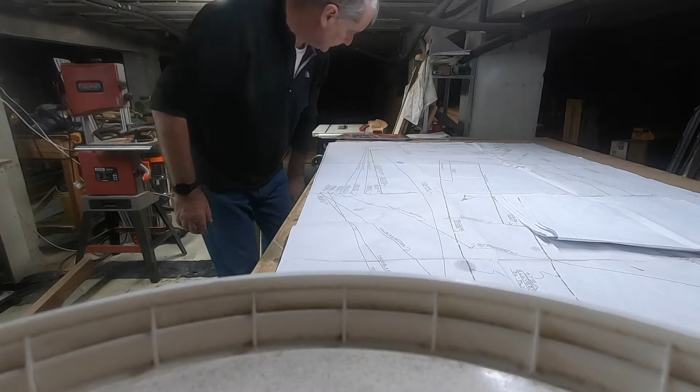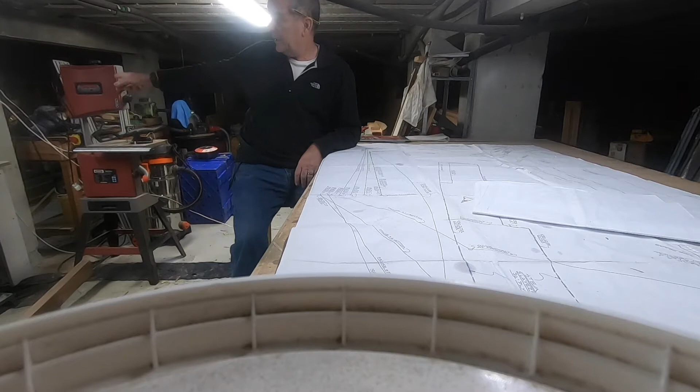I'm going to build it down here initially in my basement, because that's all I've got at the moment. This is underneath the house - I've turned the old kitchen into my workshop, and we've got the pool kit and stuff over here, plus loads of storage we didn't even know we had when we started rebuilding this house. The builder poked his head under a hole at the front where some sand had fallen in and said, 'we've got a basement down here.' So we dug a set of steps, and anyway, here we are.

The reason I can't put the boat together here is because all I've got is, I can show you, the door - and obviously the completed boat won't go out through it. So I have to put the frames together here to start off with, and I've got the plans for all of that.

There's all the plywood, many sheets. I've bought Sapele plywood, and then just got some normal, I think they call it Okoume or something, I don't know how to pronounce it. And then I've already started cutting out some 18mm marine ply - most of the wood is stacked up here, and I've labelled it all so I can see what's going to do for what.

Tools-wise, I've been accumulating. I've got my saw bench here, which is going to be very useful, I think. I've modified it slightly because I've put a floor switch in here so that you can press it on, but you have to press your foot to get the power.

If ever you get into trouble, you can just take your foot off the floor switch and it will cut it off. I never did quite understand why that wasn't done as a matter of safety, because the blade is turning towards you with this thing. If ever you get into a problem or it kicks, it's going to throw the lump of wood back at you, and both your hands are here trying to hold it, so you'd be fumbling down here for an off switch. Whereas with your left or right foot there, you turn it off straight away.

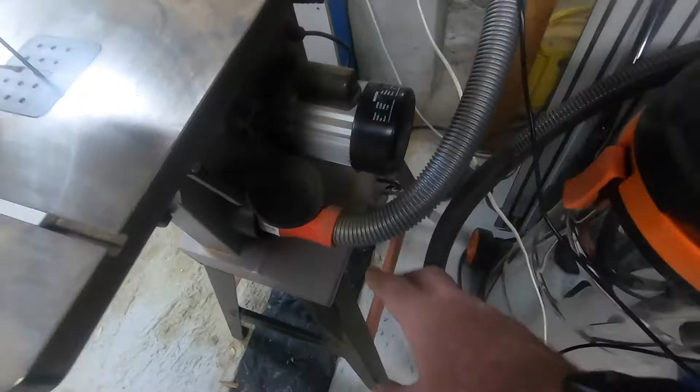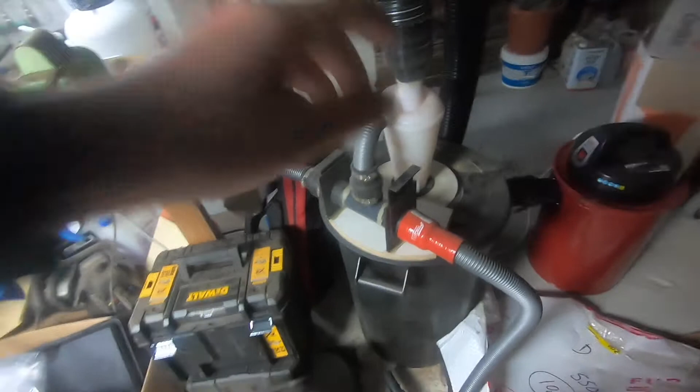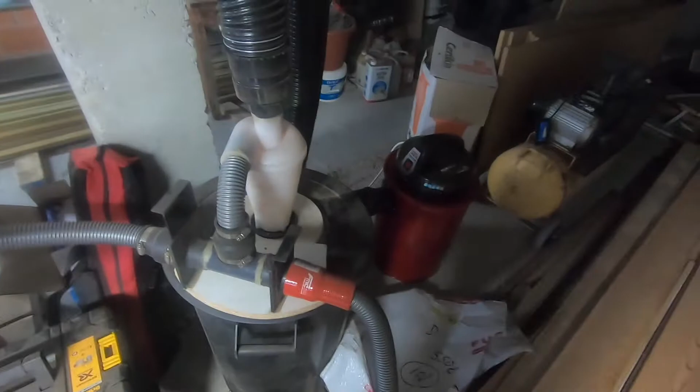With all these things, of course, they produce a lot of dust. So I've got a hoover for the floor, but I've connected it via this to this little thing - initially I bought that for the drum sander, which of course fills up in no time with dust. So I bought this dustbin, found it on eBay, care of, I guess, Mr. Dyson, the Hoover man. It just sucks down this pipe, up that pipe rather, and the pipe connects into, say, my saw bench there, and then you've got these blast gates. You open the blast gate for each side or both sides, and it sucks in, goes round the vortex - the sawdust drops out into the bottom, the air goes up into the top, and the dust fits in there. Since I've done that, it's been brilliant - I haven't changed any of the dust bags in the Hoover at all. So that seems to work quite well.

So, well, what am I doing? Why am I doing this? Good question. I'll think about that one. Why am I doing this?

I've always wanted to. I've seen these wooden mahogany boats, with the beautiful foredecks with white birch strips or filling on the decks, really high gloss varnish. They look beautiful - gentleman speedboats, and this is a gentleman speedboat, but it's got the barrelback, which is here on the plans. I'll show you a bit later because I've already started making it.

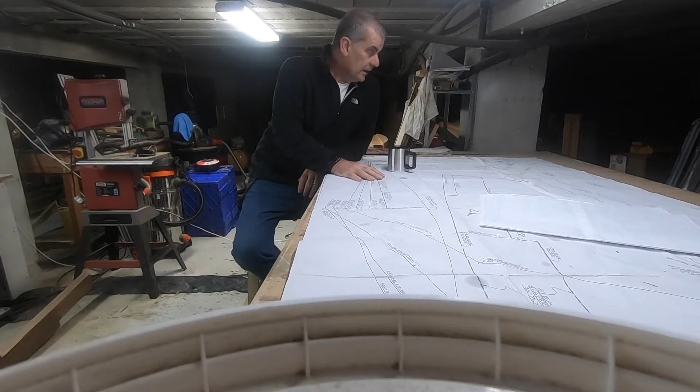I think it's going to take me probably a couple of years, because we've got to wait till our house is ready - there's a double garage where I can build up the frame on which to sit all these frames once I've built them, to actually start constructing the boat together. But in the meantime, it's going to take me quite a few weeks, if not months, to put all these frames together.

There's a lot more in it. And why am I videoing it?

There's lots of stuff. I saw Joshua Burks on his channel, and he made a zip boat, and he did a fantastic job. And he was like me - I'm not a carpenter. I built a wooden boat before as a kid, so this is kind of a second attempt at doing something.

A little bit more money later on in life, you have to buy some proper wood for this, because you can't buy rubbish in the marine environment. It just will not last, and it won't look good. If you don't build this barrelback right, it'll look rubbish.

And so you've got to put the time and energy, you've got to have the right intention. The learning curve is already steep - I'm learning as I go. You've got the Glen-L forum if things go wrong, and there's also the Boatbuilding with Plywood by Glen-L, which is very informative, which you need to read in conjunction with all the notes along the way to figure out how to do it.

My intention was to be a little more specific, to make this video really with intent to somebody else like myself starting to build a wooden plywood boat, speedboat or whatever, particularly a Glen-L one, and to go into a little more detail as to how you do things - not just show you a frame that's been built and say, there's frame 1, 2, 3, 4, 5, 6 and 7, because there's a lot of stuff involved in actually building the frames.

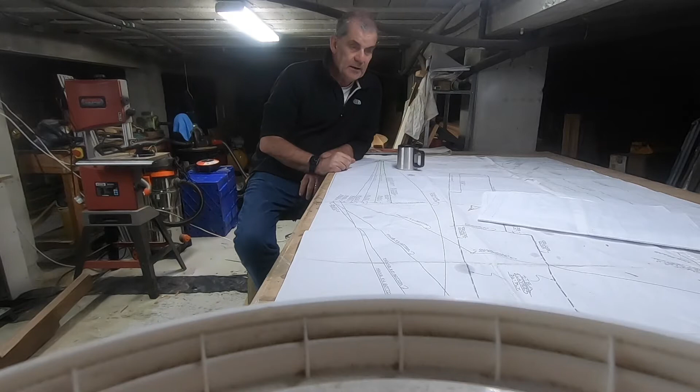But that's my plan. I've already started building. I'll get on to the second part, but I'll just get the bits out and show you what I did and how I did it so far, and then we can talk about constructing the frames up and see how we go with that.

So, Boycie's Barrelback, here we go, head down. Building the frames and the plans. This is sheet 2 of 4.

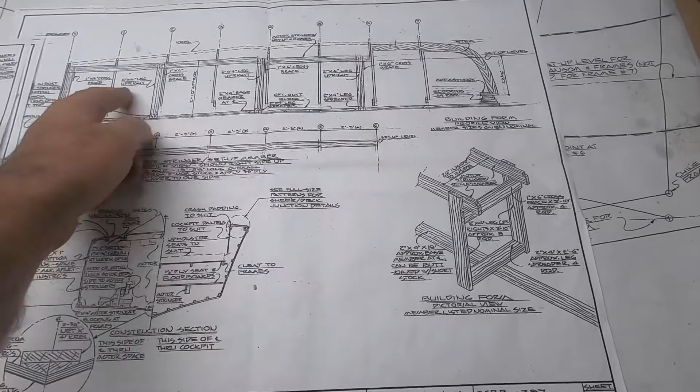There's various bits - this is jumping on a bit. This is going to be the boat set up on the frame, and then you're going to put the frames on and the stem section, and really start putting it together with the longitudinals.

This one is way up in front, once this boat has been pretty much built, showing where to put the motor in and the deck framing and so on.

And that's a point - this is planned for I think it's a V8, a V6 or something, but something like over 150 to 250 horsepower, if not more.

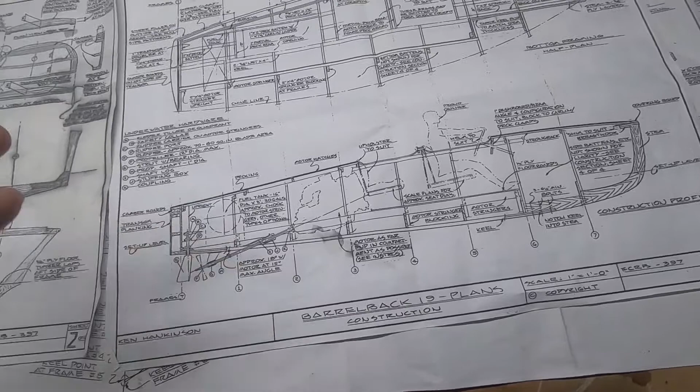I quite like the idea of putting in a couple of electric motors, or maybe one electric motor, but two for redundancy. Put the batteries along the bottom here, and have an all-electric boat. I know particularly in America you love the V8s, the sound and all the rest of it - the V8 motor, you just can't beat it. But in this day and age, my next car is almost certainly going to be an electric one, so why not an electric boat?

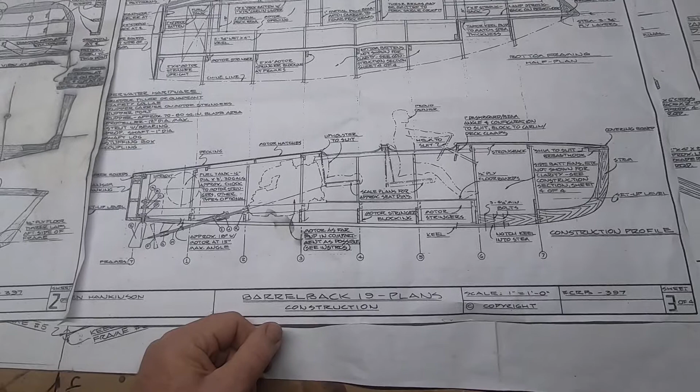The technology is out there, and hopefully to get sort of 6 to 8 hours of useful boating out of it, which would be nice. But I've got to research all of this. I've got a contact, and this is all going to come later, so hopefully that won't happen.

So this is where we are at the minute, where these are all the frames - 1, 2, 3, sorry, 1, 2, 3, where's 4, 5, 6, 7, 8, sorry 7, what am I talking about?

So that's at the front with the deep chine section, and this is where I'm going to start, on the back, on frame 1. And then I'm going to move to the transom and do that. The reason being, I will explain.

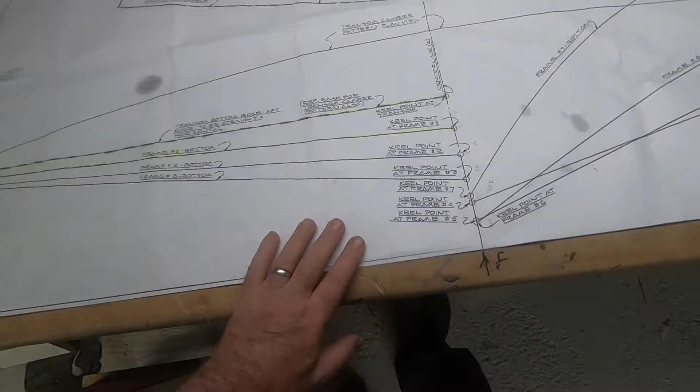So if we move to the larger plan, you can see what Glen-L's done is given us half the frames, on the basis that through a centre line you can reverse it and draw the other half. So if I start off with frame 1, here it is, frame 1 at the bottom, and there's the keel point, which I've highlighted.

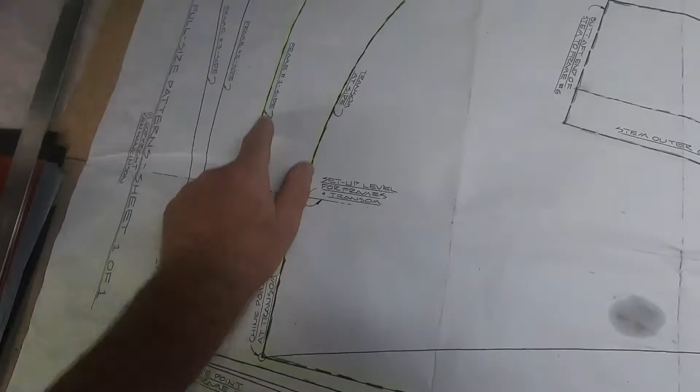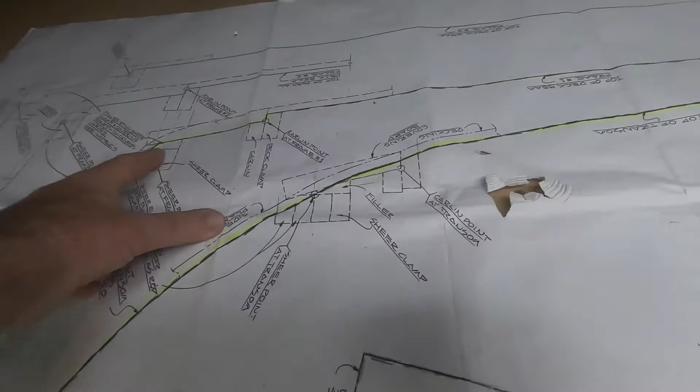So there's the chine point. The sheer point there is the outer edge where the deck meets the upright part of the boat, and the carlin point is there. That's where you get an inboard deck structure, and these are just reinforcing frames, obviously.

And then there's the centre line. So the first thing I did was draw the centre line onto my big desk. I did that there and did it here, and then drew that line there so I could realign this, ready to turn it over.

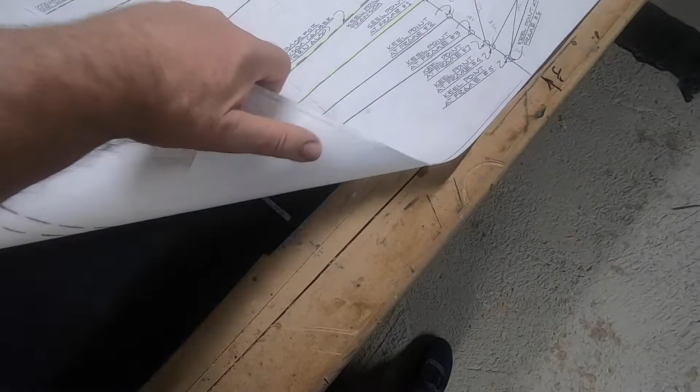And then what Glen-L say is get yourself some carbon paper. Carbon paper I used to use at school as a kid, 30-something years ago, but there it was on eBay. So you get two lots of carbon, and you put one down and one up, underneath, all the way around the frame.

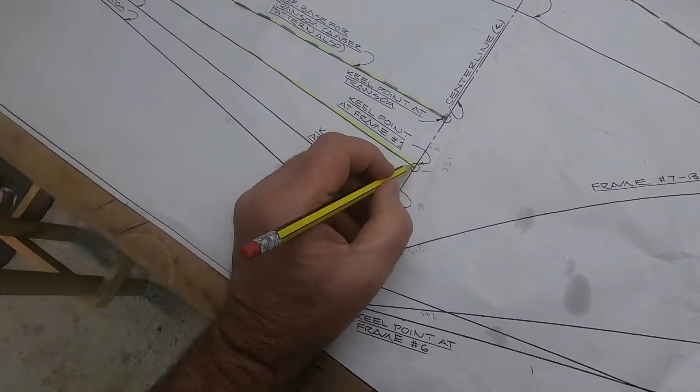So you realign your centre line, and then I put some tacks in there, just some little pins to hold it still. And then with a pencil I just started going round on frame 1, colouring these in like being back at school, going all the way around your frame, and transferring that to the bottom of the plan.

So this is frame 1, and this is frame 1 here. I take them away, and this is actually the transom that I've also drawn in. So now we've got the replicated outline on this side.

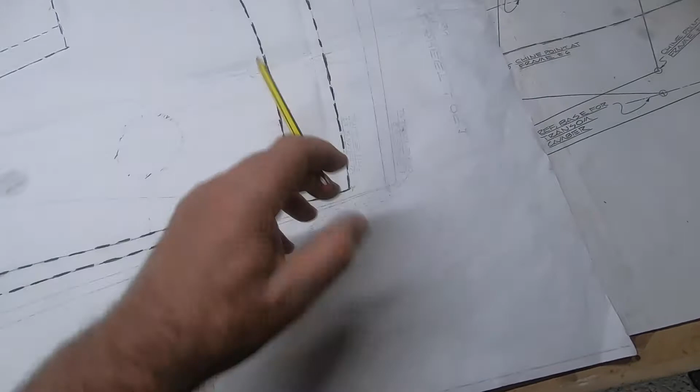And the reason we do that is so we can turn this over and flip the whole thing, realign the centre line marks with the centre line on the table, and then do exactly the same on the other side, because we want the picture of the whole frame. And there, that's what I've done here, and there is the all-important frame 1.

So why do we want to do that? You want somewhere to check that when you've cut this piece of wood out, you've actually got something that is the shape it should be, which I hope will make sense.

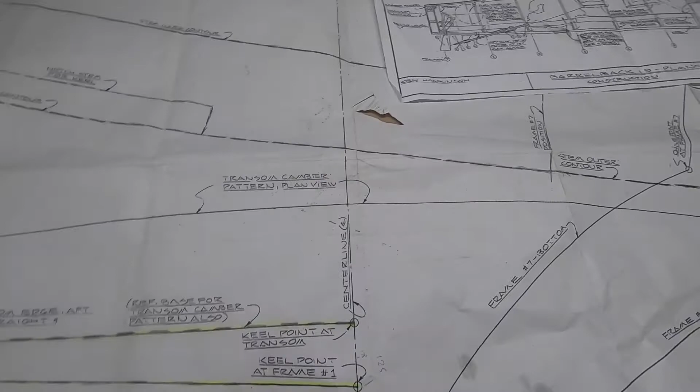And you've now got to transfer this to your piece of wood. So now what you can do is put your piece of wood underneath there, under the plans.

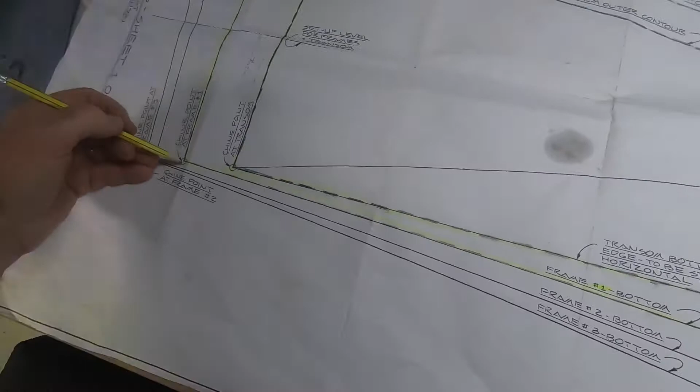Let's say you're going to make this upright piece here. You can just stick that underneath the plan - sorry, I'm running out of hands here - put that on top of the piece of wood, and now you can just do the same here, and it will transfer that line to your piece of wood. And hey ho, you have got a line in which to cut. So that's kind of how.

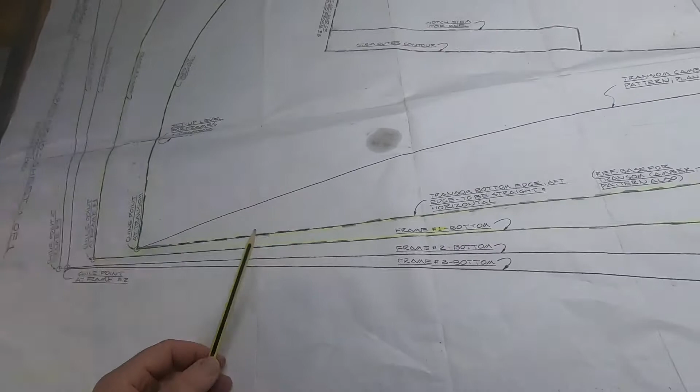And the plans, I have to say, come with some other instructions and a list of wood, and it talked about wood up to 10 inches, but it wasn't very specific as to how you calculate that. So that had me stumped for a little bit, and then I sat down and read the plans, and then you've got this - a setup level for the frames and the transom.

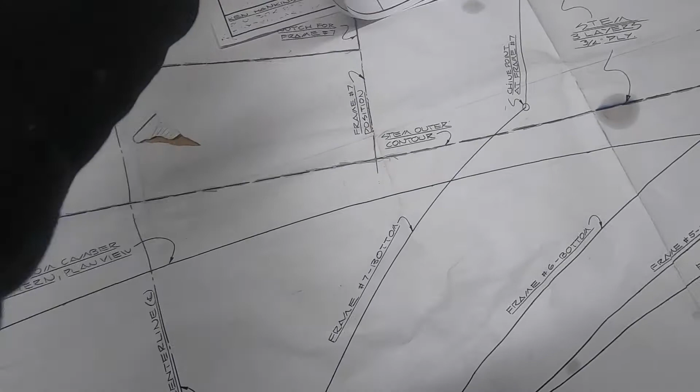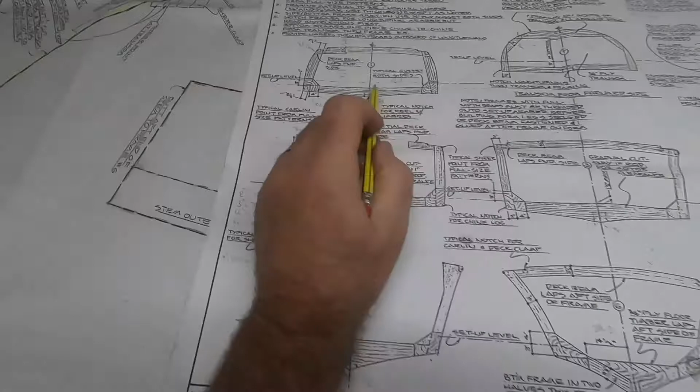And that was the key to all of this, because on this plan - if I show you - you've got a setup level. There it is. And on these setup levels, everything is 3 inches from the setup to the top of this piece of wood here. It says it on a few bits and pieces, but it's basically 3 inches, and that is going to give us the top of that frame section there.

And the reason that's important is because that's the floor. So when you turn this boat over and want to put a floor plank, obviously the floor planks all want to be level, and that makes perfect sense.

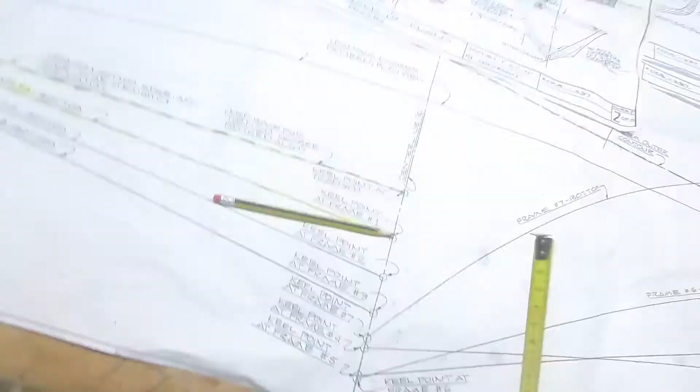So you have to draw the setup level in, and that's what I did here. I marked the setup there, transferred it to the table, and then I measured down, and there's my 3-inch line. And then from frame 1 up to there gave me the depth of my piece of wood, which is about 155 millimeters.

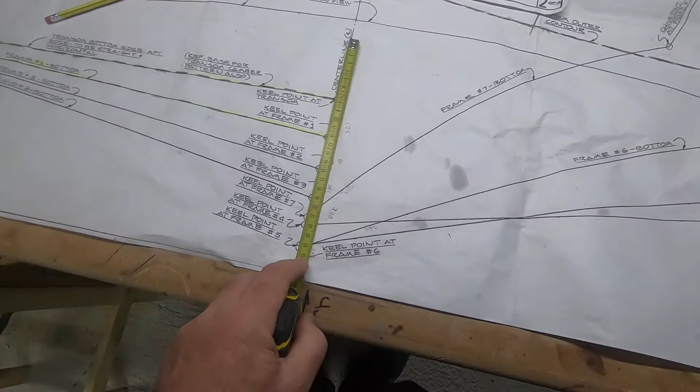I'll be working in millimeters as we're in Europe here. So that meant from that line, when I came to do frame 3, that was going to be down there. From that 3-inch line to frame 3 is 190 millimeters, and down to the keel point at 6, something like 243 millimeters. That's the depth of that wood to bring up to there.

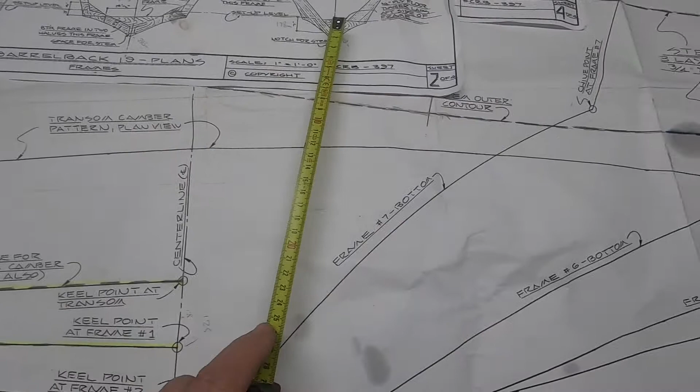So if we've got frame 6, you can see it's quite a deep piece of wood, quite short, and frame 7 probably not quite as deep. So 5 and 6 look to be about the deepest frames. That's where we got 6 from there.

And so I need a piece of wood 250 deep, really - about 10 inches. I don't have a piece 10 inches because I didn't read the Glen-L instructions very well. So I've had to order that, and that's going to take a little while as we're coming up to Christmas, and it won't be available till the new year.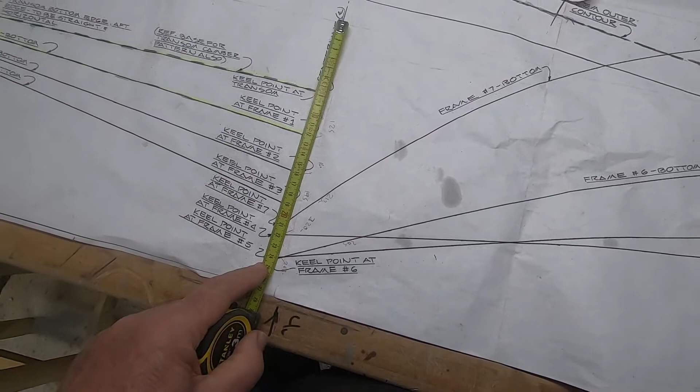So that's why I couldn't go any further with frame 1, because I really want to make that frame 1, at 120, out of one piece of wood. I don't want to glue stuff because this is a major structural part of the boat, and it needs to be one piece of wood, then just cut that out. So it kind of stumped me a bit there.

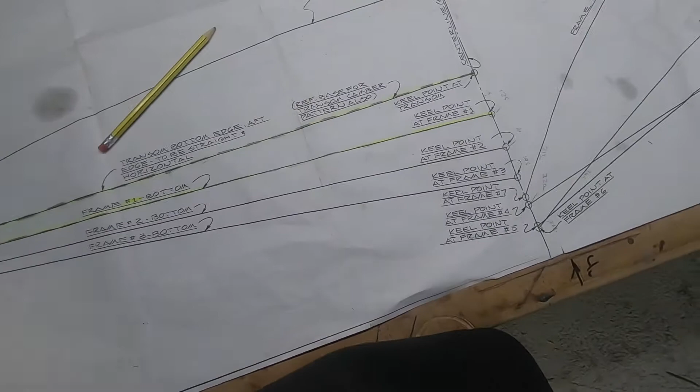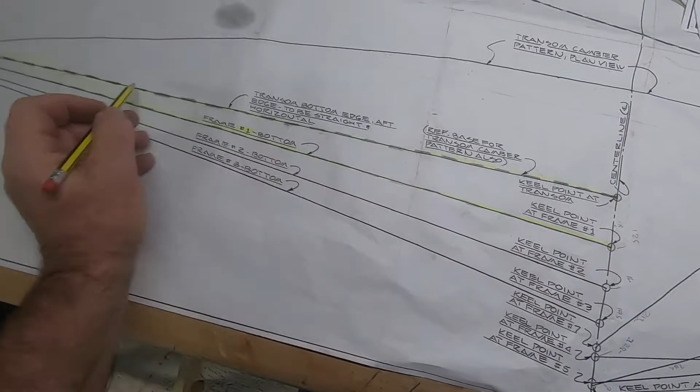So I've ordered those pieces of wood, and I thought I'll move on to the transom, and I did the same with it - there it is, the transom, with the same lines underneath. Then I cut out roughly a piece of the 18mm plywood I had, put it underneath, put the carbon paper under, and traced that line onto my transom, and was able to cut it out.

But not before I had read this, because there is a camber on there, and it's 12 degrees on the camber boards. It says: allow extra material at the edge on the forward side, cut out at 12 degrees bevel all around.

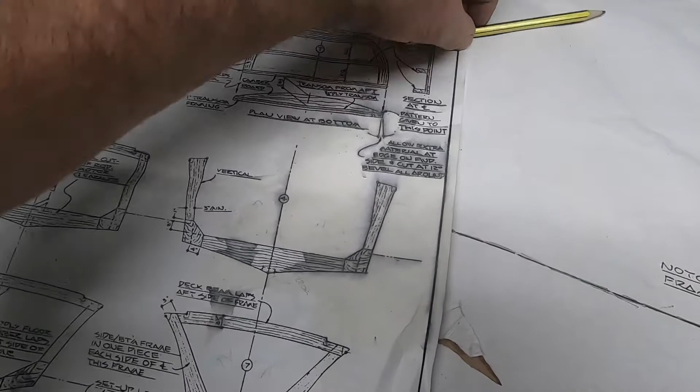So extra material - you cut this line to this line here to cut the wood, and then you can see just about there, hopefully you can see it cambers up, and that's because the deck is coming down slightly at 12 degrees, and from the sides it's coming in slightly.

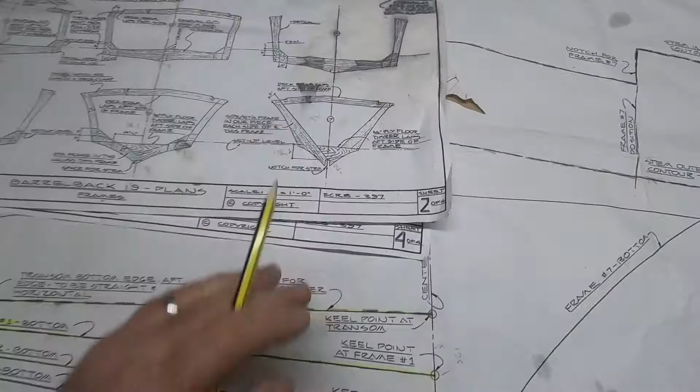So 12 degrees - what I did was cut about 5mm extra wood all the way round on that one, then I had to find a way to cut a 12 degree camber on the wood. The way I did that was to use a good old protractor, lined that up there, got a 12 degree line, did it a good deal more accurate so I could be spot on at 12 degrees.

Then I got myself a setup - let me see if I can find it. So that's what I was after. You can adjust this by setting it on your lines on the table. I set that to 12 degrees, and then I just transferred that to my jigsaw, and by putting that flat and up against the blade, I got to be within a degree at least, I would think.

And so with that I was able to go around my piece of wood, around the transom, around the outside, and cut it at a 12-degree angle. I couldn't think of any other way of doing it because it's curved. The jigsaw is obviously the tool for doing that, and there's probably another way of doing it, but that's the way I did it. So I cut out around the transom, and I can show you - the transom is there.

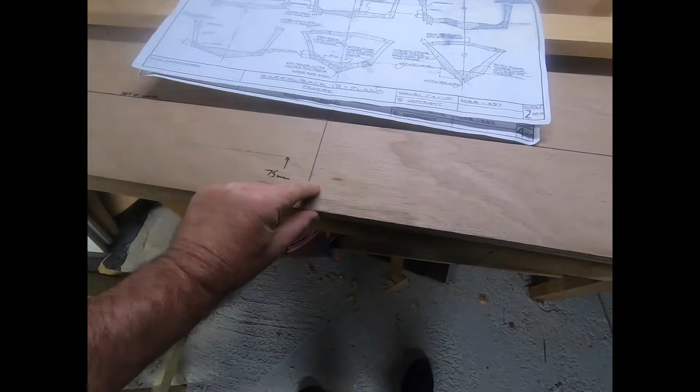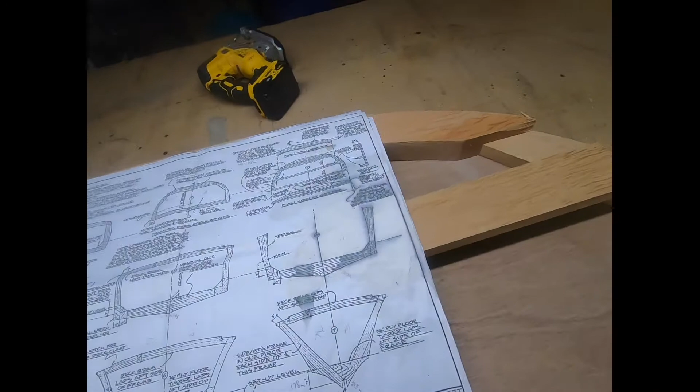So if I get that up on the table, this is my transom. The bit along the bottom there is horizontal, it's flat, and everywhere at the sides has got that camber for the frames to come in, and they will eventually notch into the deck timbers. The keel timber will be along the bottom here, but it says on the plans that you've got to notch it in through the frame and through the plywood to give it a good base on which the longitudinals will sit. But that comes way in the future when it's sitting on its frame, and I won't be doing that just yet. I've got to move on a little bit.

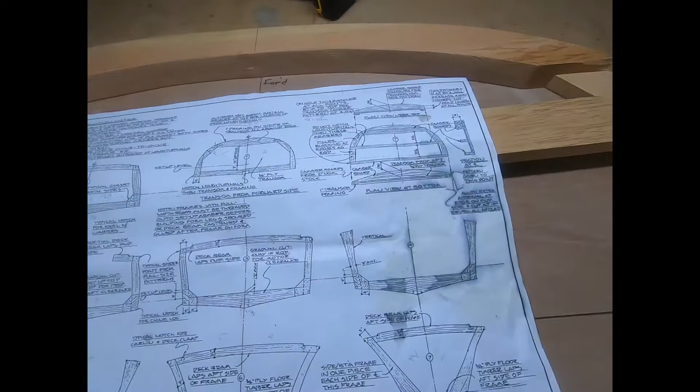So then the next thing was to build this frame, and this is on the inside of the boat, and this is clearly reinforcement. This piece of wood, it says it's not shown, but there's a doubler at the top, so what I've done is to build a double thickness piece of wood. I had some 1-inch wood, or 25mm, and this is 50mm, so I was able to just do it out of one piece, and it's there.

It's one long straight bit, but that was like a huge piece of wood. In fact, here it is. I cut it out here, and that's what it looked like, and I thought, wow, this is just ridiculous extra weight to the boat that doesn't seem to be doing anything. I'm going to notch in 1 inch into there.

There is stacks of wood plus plywood behind it, and on the other side I've got these camber boards yet to finish, and there's 1, 2, 3, 4, 5, 6 sections there of 2-inch wood which is cambered, so that this is going to give this the barrelback shape.

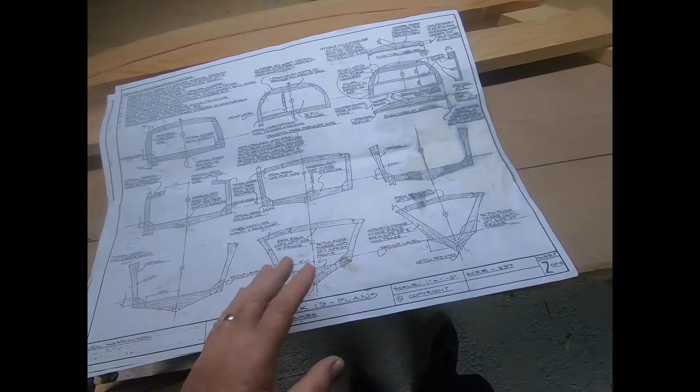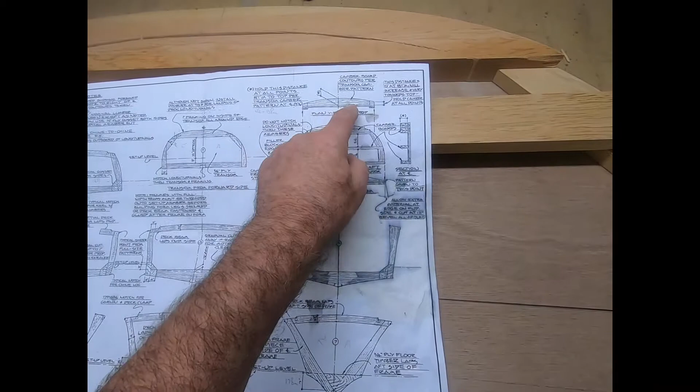So this is facing forward, and this is looking forward from behind the boat. So there's your 4 strips of wood, the 5th in the middle, 6 down the bottom, and at the bottom you see it's cambered. They're the same camber, all 3 sections here, 1, 2, 3, but as you get to the top they seem to move it out. So at the bottom the camber touches the plywood either side, so there's going to be an awful lot of cutting and planing to go on here.

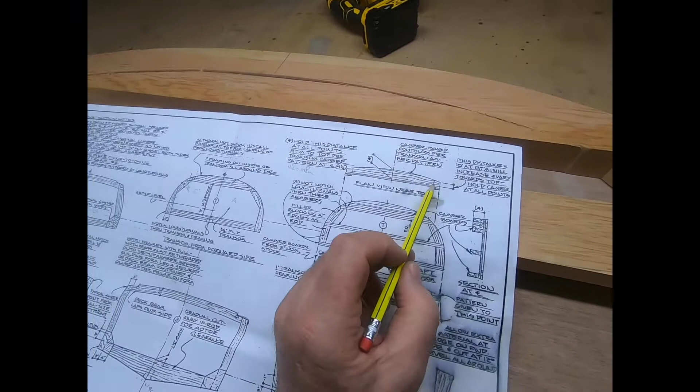And then at the top, I can't find that distance yet, what this one here is meant to be. It just says this distance will vary and increase towards the top, but hold the camber. So I guess cut all these pieces of wood together so that the camber's all the same, and then perhaps fit them. This one to the bottom will be straightforward, and then this one will poke out slightly here, won't it?

So then I can cut that off, and just see how that goes. But that's got to look like that at the top. So it's very difficult looking on a 2D plan to figure that one out, but it will look like that from the top and that from the bottom. That's the next thing that I've got to do on this.

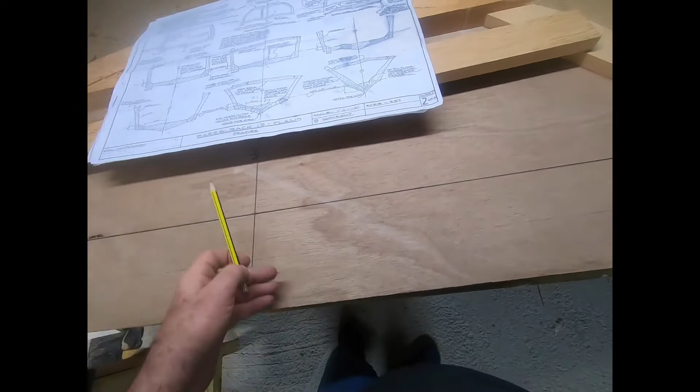But for the meantime, let's go back to the frames, because we had the same old setup level which is there. So the setup level, I came off the plans and I actually drew on the wood. I'm kind of slightly regretting that, because I did it in a pen rather than a pencil, and I think that will possibly show.

This frame is just loose at the minute because I'm going to glue it, and I drew the center line forward there just to remind me what was going on. So from the setup level we come down the 3 inches, because that determines this piece of wood here, and that piece of wood I believe was 75mm.

There it was, and I had 80mm, so I put it on and then I just planed it off. So I planed this flat so that I would know it would be at 90 degrees. The way I did that was with an electric plane. I bought this brilliant piece of kit because it comes with its own sawdust bag on it.

And then you have this which you slide in and you adjust that side level there, the gate obviously to the side of your piece of wood, but that's your 90 degrees. So between that and the base of your planer is 90 degrees.

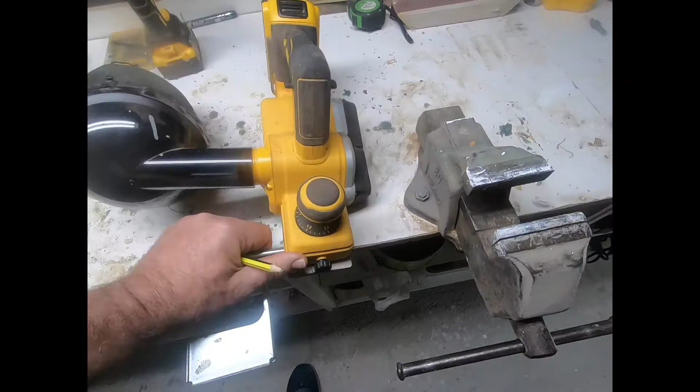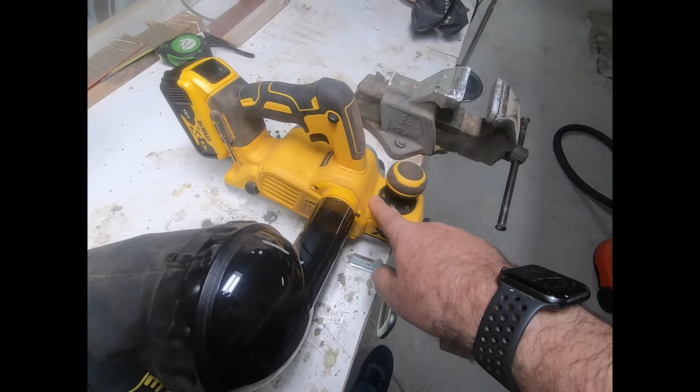So by holding that flat against the side, I was able to just run along the whole length of the transom, and then you just set the depth here of the blades, 0.4 of a millimeter each time, so it's just doing it very gently, and you fill up that bag with ease. And the reason I like this is because it's got 2 blades on the bottom of this, and so it cuts superbly well.

18 volt with a 5 amp hour battery, they last forever. They are really good, so I've been accumulating all my tools. I've got the drill and circular saw, and I've got a cutter, I don't know what you call those things, but one of those, a light, and I've even bought myself a metal cutter, disc cutter with that.

Sanding, this is brilliant. I found when I'm coming to do, I'll come back to this, but if you want a vertical sander to a line, you can sand this off so precisely, and that is how I managed to get these pieces of wood.

I see this, there's a guy called Leo building a boat out near Seattle called Tally Ho. Hats off to Leo, he is just an amazing carpenter, sailor, boat builder, shipwright, whatever you want to call them. And they do these frames, and they just slip into place. I just think, oh my God, how would I do that? So I sort of thought, I'm going to do that. I want to build, and there it is.

I put that piece of wood in. Well, I did this piece of wood first. I cut this. Perhaps I should start from the beginning. This was 80mm wide, so what I could do was, obviously, that was the original line that I set it on there, and then I realised, of course, we've got the camber, and this has to follow the camber.

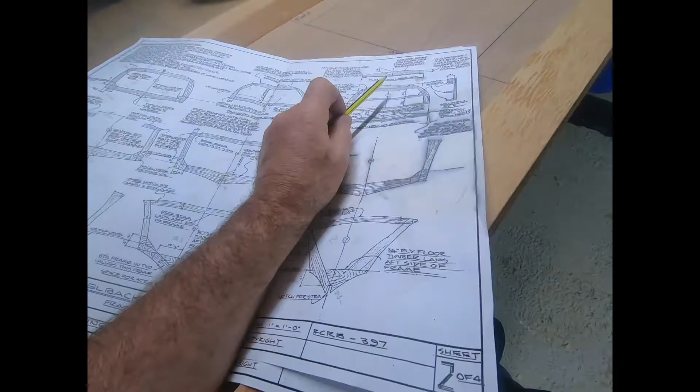I've got some screws in here, so I've taken this off because I can now epoxy this down and let it set, and then I can turn it over. I've got to start making these, because until I get some more wood I'm not going to go much further. So I might just do another video of that happening.

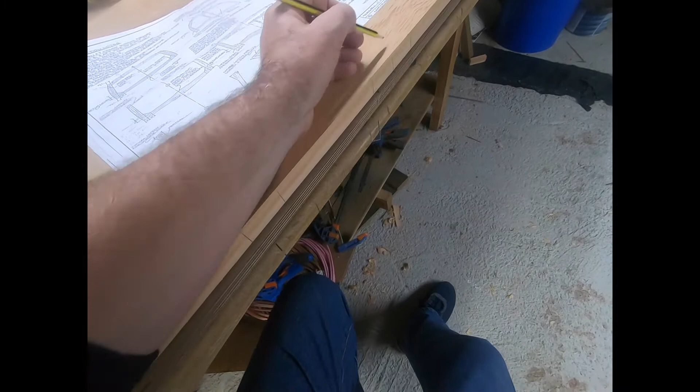These I can't fix - well, I can fix with screws, but I can't glue, because we're going to have to fit the longitudinals. So this, for instance, is the keel timber, and I've already marked some of these out here.

So I've got to cut that out and go through the plywood. Obviously, if I've got my camber on the other side, that's no good. It'd be easier just to saw through that into that line, and then cut this line out here somehow to make that completely flat.

There's another lesson, I think, on cutting. That will give the board, the keel timber, this plus the plywood on which to bed, so it's got a good mating bed there to glue and to screw, so that won't come off.

And then once all these longitudinals - I think there's 5 here along the bottom, and then there's going to be some more up the top, some deck timbers up there. That will be something for the future when we're mounting all the frames together and putting longitudinals in.

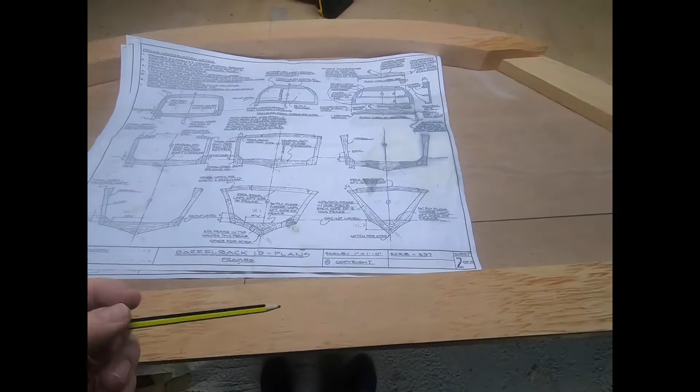And then once they're in, I can refit these - the barrelback effectively - to the transom and glue it and screw it, and then I'll probably epoxy this. So yeah, that's all, no reason why not.

I can protect it with that. So that is the transom. And then the other thing I've done is this.

There is the stem section, and that took a bit of head scratching, a lot of work. It's 3 layers, you can see, of 18mm ply, marine grade ply, epoxied together. And this is the breast hook, which is 2.

Epoxied together, I've screwed them through here, and this one fits there. This bottom layer just cuts in on the back of the stem, and the top one covers it. And so eventually we're going to get the sheer wood coming round the bend of the boat here, and it will cut into here, hopefully in a nice joint, and then it will be decked over the top.

But this is where it will all meet at the front, and the breast hook is the start. You can see how wide this boat flares out on either side. So I'll get the plans back up and show you what I've done.

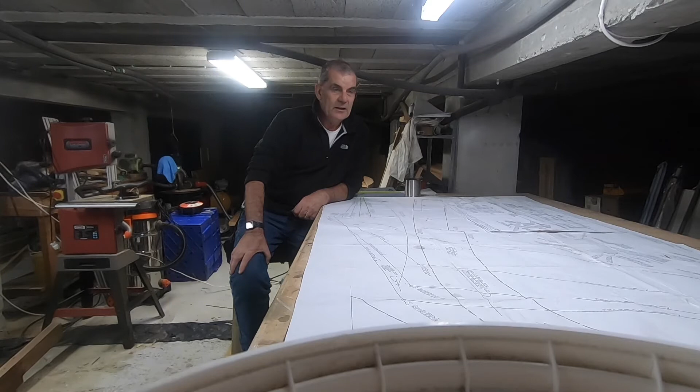Having done some of the transom, as I explained, the next bit I can do is the stem. Until I get my wood, I can't really build the rest of the frames because I need that extra deep bit of wood at the bottom, which I don't have.

But this I can do, because I have several sheets of 18mm marine ply, and so I can cut these out, as you see I've done.

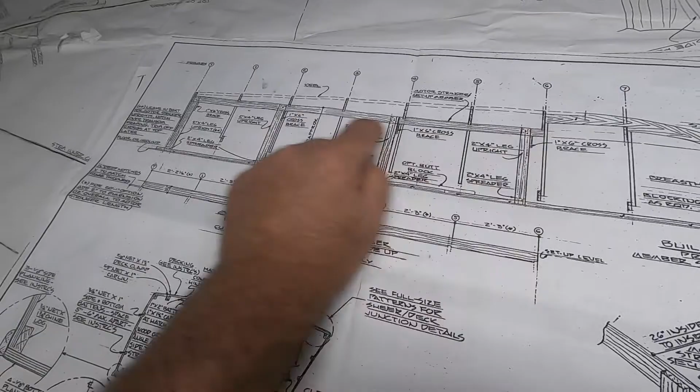So this is the first plan, and there's the all-important setup plan. You can see that the setup level is actually this bit of wood here, which is the motor stringer, where the engine will sit on either side, and the weight will be spread across the frames inside the boat, which makes perfect sense. That's 3 inches deep, and then you've got that to the top of the frames, which gives us the level floor we need to walk on when the boat is finally turned over and fitted out.

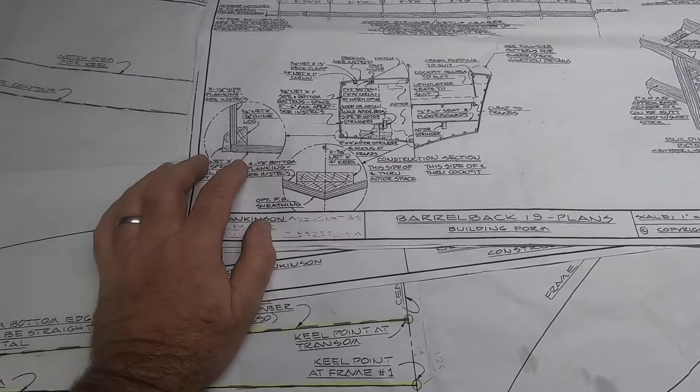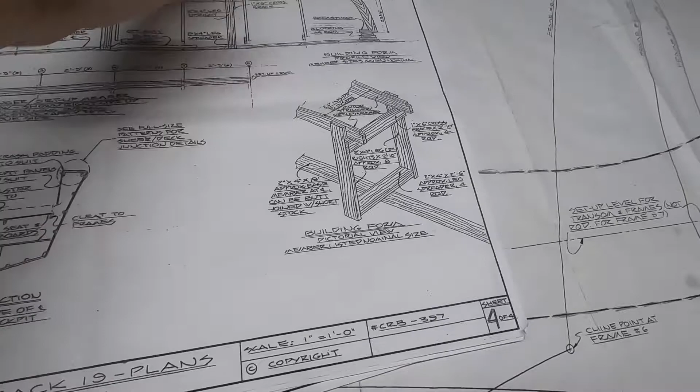So here's the stem section, and it's this weird shape here. You can see there's a notch in there because this is the keel timber, and there's some bits and pieces going on which tell us the dimensions - I have to convert these back to metric to make sense, but it looks like 2 3/4 by 4 inch, so 2 3/4 down that way and a 4 inch wide keel, and that notches into this bit here. There's a continuous keel all the way down, and that will eventually be faired into shape for the boat because of the varying chines, which will differ as we get up to the front of the boat.

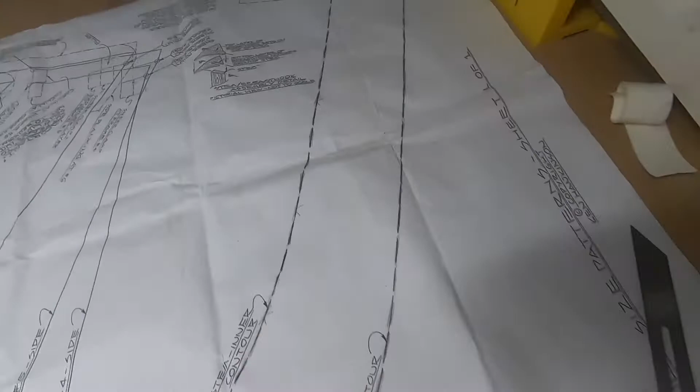So the shape of the keel, the stem, is here. There's the inner contour, there's the notch for the keel, and then this is the notch for frame 7, at the front, which will notch into this bit here. Then 3 bits of wood go up there, and then there's a breasthook up here - that's another story - and there is the shape of the breasthook as depicted by Glen-L.

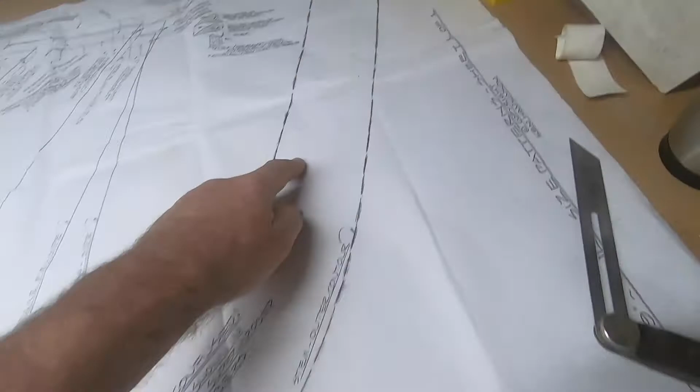2 layers of 3/4 ply, see the assembly detail above. So you can see this is the top section of the stem section, and this will eventually be faired off, but at the moment it is square.

That doesn't really show us a correct depiction at this stage of building, because this should really be out there. So that's a little bit confusing, but this actually is the shape of, I finally worked out, 2 pieces of wood, not just the one.

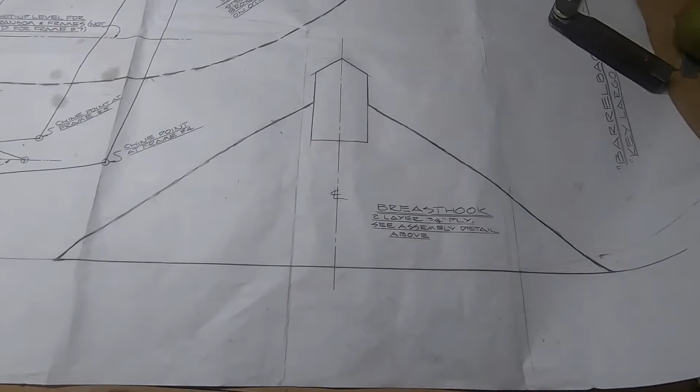If I look up here, the top section fits on top of the stem, and that will come out here and be fitted and screwed onto the top. But the bottom one seems to sit underneath the back of it there, but doesn't encroach in there, and that's not what this shows, because it seems to say that the bottom section comes in halfway along the stem, which then forms the 30 or 40mm for the sheer line to come in there and connect to the stem, giving us the shape of the boat. This gives it its form, and obviously this breasthook gives it its strength.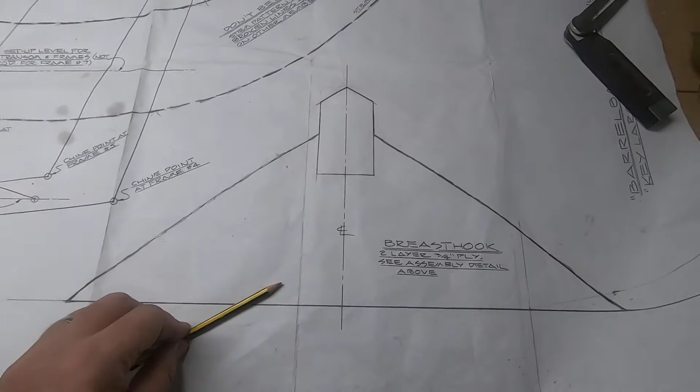So after much deliberation and head scratching, I went on to the Glen-L forum, and they effectively said to me, "Stupid numpty, read the book on how to build a plywood boat."

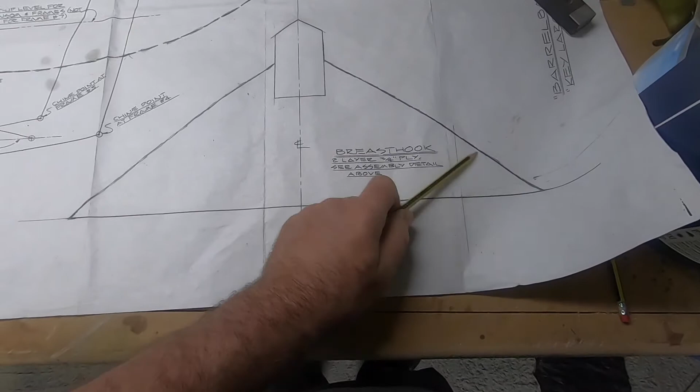And that book has got a much better picture of this, showing that the lower piece of wood is indeed notched there, and the upper piece of wood sits on top. So as you can see, the lower piece of wood comes halfway up the stem, and the original plan doesn't show that clearly - it should really be depicted like that, I think, which would have made life a whole lot easier for me anyway.

But there you go, that's probably just a slight inaccuracy, but whatever. We got there eventually, and thank you very much to those on the forum, because then we were able to cut them out. So the way to do this was pretty much the same.

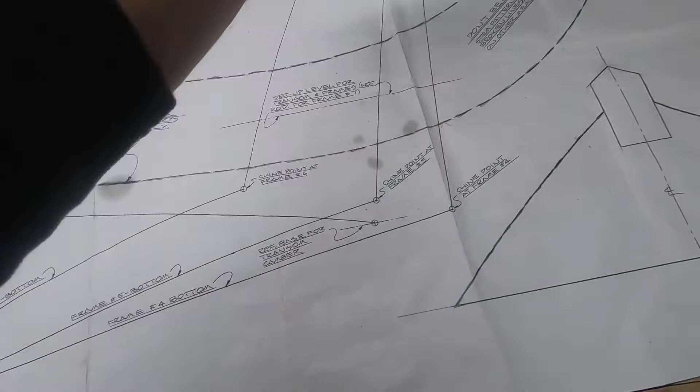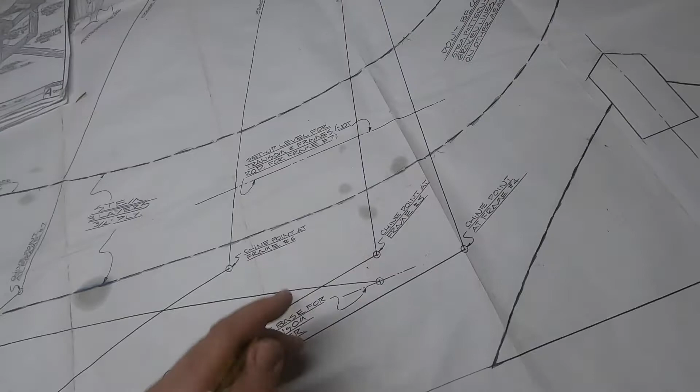I rough cut my piece of plywood out, way oversized, and then I put it underneath, and used just the one sheet of carbon paper because I only wanted to mark this line onto the piece of wood. By putting that down, you can see where I've drawn all the lines around here, and I could transfer that to the piece of wood, and then cut it. I cut it here because this was fairly on, about 5mm proud, which was too much really, because you've just got too much wood to remove.

And this bit here I didn't quite understand, because this is obviously for the keel, so you don't want that piece of wood, you want this cut out. So why would they put that in there? Okay, it's an outer stem contour.

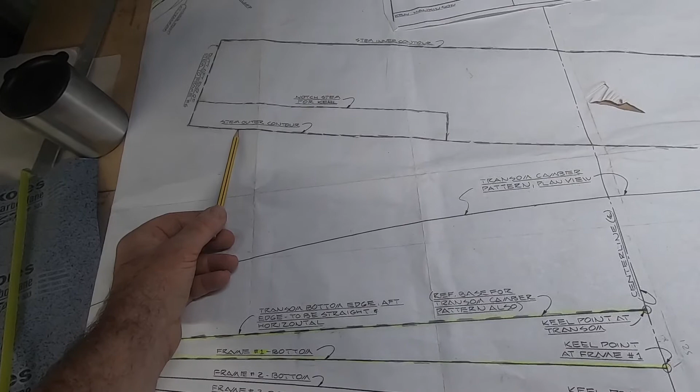Maybe I've done this wrong. I don't know, I don't think so, because everywhere says this is where the keel section attaches to the stem, so that piece of wood has to come out, I believe. At least that's what I've done. If I've done it wrong, then I've done it wrong.

So that I did, and there it is there. But it wasn't like that when it came off the board, because this piece here had to be cleaned up and faired to a nice curve, and the same on the other side, and I had quite a bit of wood to remove.

So how did I do that? Yeah, that was quite difficult. I asked again on the forum how people did this, and the best way, it seems, is to use your angle grinder with this sanding pad. It's folded into little pleats here, and is very abrasive. This whizzes around at high speed, and it takes off a lot of wood. You got to be very careful, but it gets it very near to the shape that you want. And where else? Here it is.

I used a spokeshave, bought that on eBay, and there's the blade down there. You can adjust the depth of it, and then by pulling that towards you, it will follow the shape of a curve far better. And so after a lot of elbow grease, I got that to work, and it was quite good.

I probably took out a little bit too much wood, so I'm probably a couple of millimeters inside that line, because once I cut it, you can lay it on the plans again, and see that it is where you think it is.

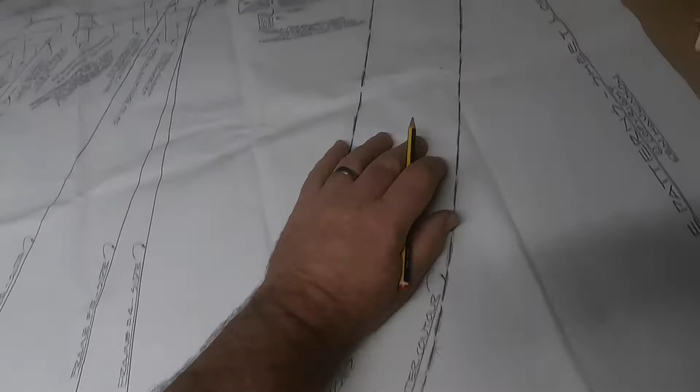And obviously the two important bits is that bit there has to be exactly there, and I ended up with a slight proud bit of wood there, so I had to plane that down, because when that breasthook was attached to the top, then that had to be at that angle, because that's the angle of the foredeck. And this bit here obviously has to be correct. So those are pretty much spot on.

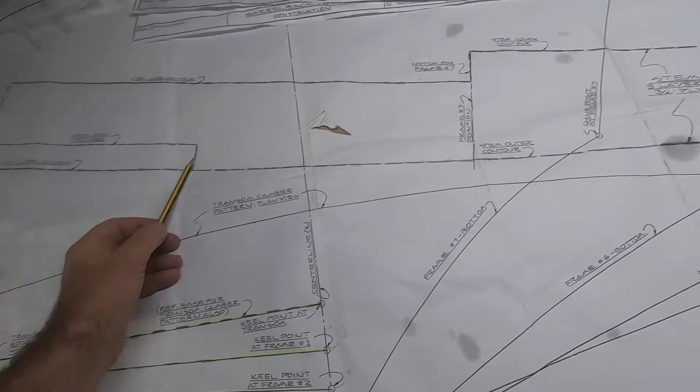The inside edge of this, I figured I might have to just take this on the chin, a couple of millimeters, because this is just inside the boat. And as long as these bits here, where the frame fits the stem, the breasthook sorry, and the keel, then you're good. The outside will follow that, which it did.

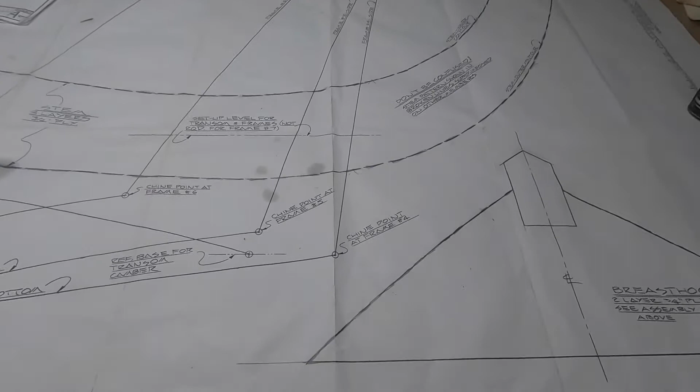And obviously the shape will be faired off like that at a later date, once all of the frames are in, and we're fairing off to fit the plywood to the bottom, because this is a cold ply boat. In fact 3 layers of plywood in different directions, laid up in sheets probably about 20 centimeters wide, and then glued together. So there's a lot of fairing got to be done with all the frames and the stem, etc., along the way. So that's about where I am at the moment.

And I took these apart, the 3 of them, and then I glued them together, as you can see there. It's a hell of a strong piece of wood. There's nothing much going to break that unless you go crashing into something at 30 miles an hour. And the same with the breasthook, 2 lots of 18mm plywood. It's as solid as a rock, that lot. So, and quite heavy as well.

This whole boat is going to be quite a lot. It's going to be over a ton, I think, by the time we put an engine or batteries and electric motors or a V8 or whatever. I mean, I would imagine a V8 is going to be 250, 300 kilos. By the time you get a petrol tank in there, it's going to weigh quite a bit.

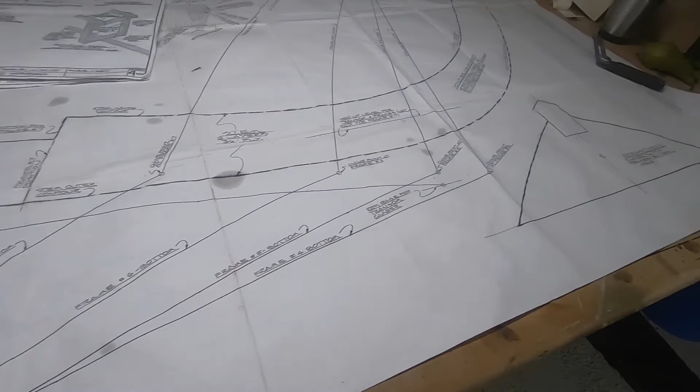So this boat is built upside down on this frame, this jig, and then once you've got it all painted, and obviously skinned and painted, then you turn it over, put it on a frame to hold the boat or a trailer, and then you fit out the inside. All fun to come. So I'll crack on with the rest of the framing for the transom on the aft end. There's a lot of wood to be done there, so I'll try and video some of that and fill that in later.